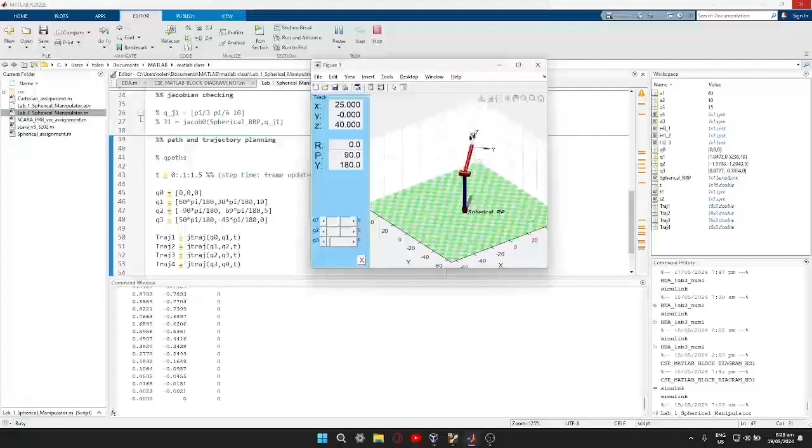So now we will run the program, and as we can see, it moves to the position that we set in MATLAB. We can double check it by pausing the video.

And now we will be moving on to Python. In Python, we will be running the pick and place file first.

First, we will be entering the values 40, 10, and 15 for A1, A2, and A3 respectively. And it will show us the scale model of our manipulator with its link lengths operating based on the values we entered. This manipulator attempts to operate a simple pick and place motion as a spherical manipulator.

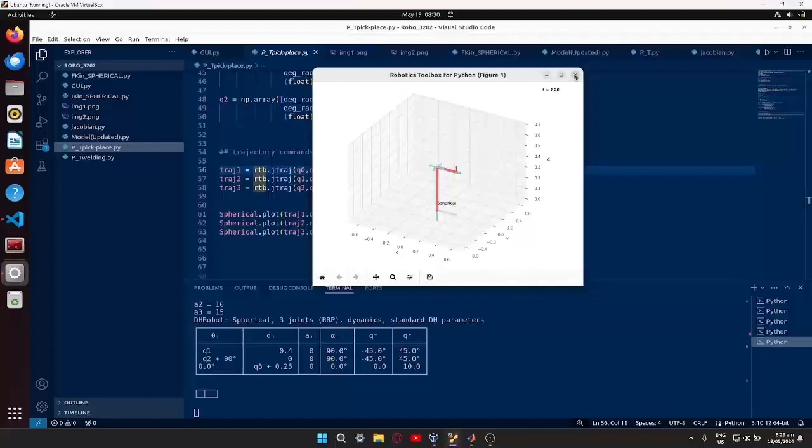So now we will move on to the welding part of our Python program. We only have to enter the values that we encoded in the pick and place program.

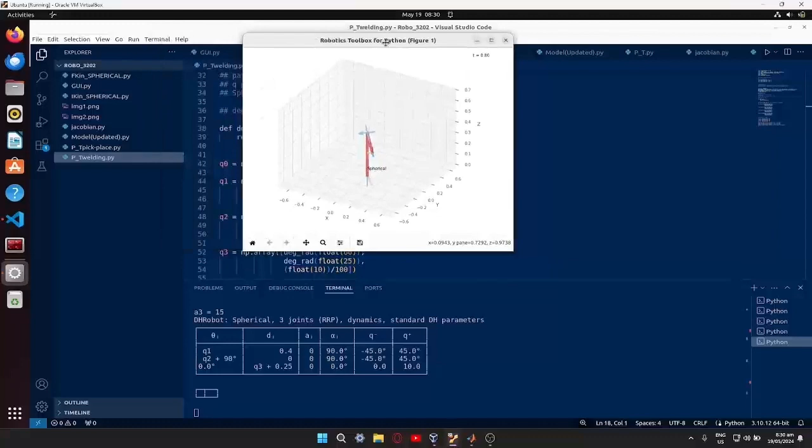Which is 40, 10, and 15. So let me repeat it. We will now enter 40, 10, and 15. And now we can see that the manipulator is trying to operate the welding motion as a spherical manipulator.

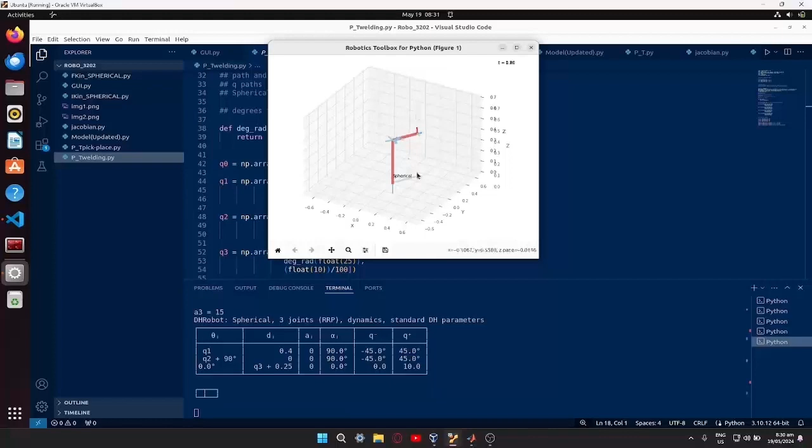As we can see here, we define the conversion that will convert degrees to radians. But now we can see that the prismatic joint is divided by 100 because we have to scale down the manipulator, while the revolute joints are converted to radians, as that is what is accepted by the robotics toolbox.

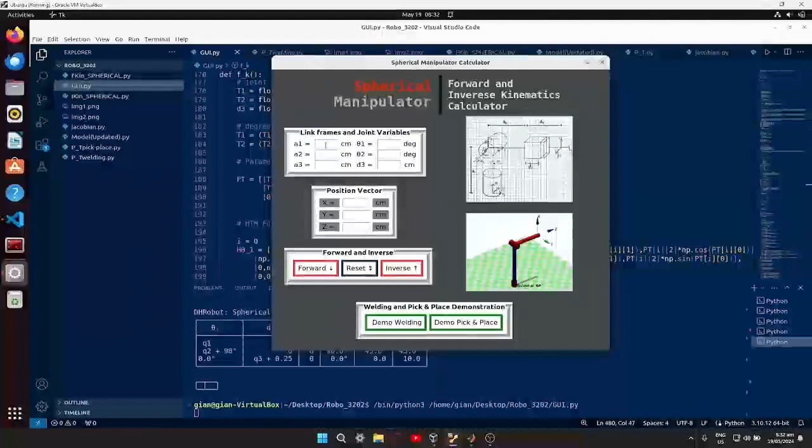The GUI calculator, on the other hand, automatically converts the values that the user enters, and these values are suitable for the use of the robotics toolbox, which is used by the GUI calculator as well.

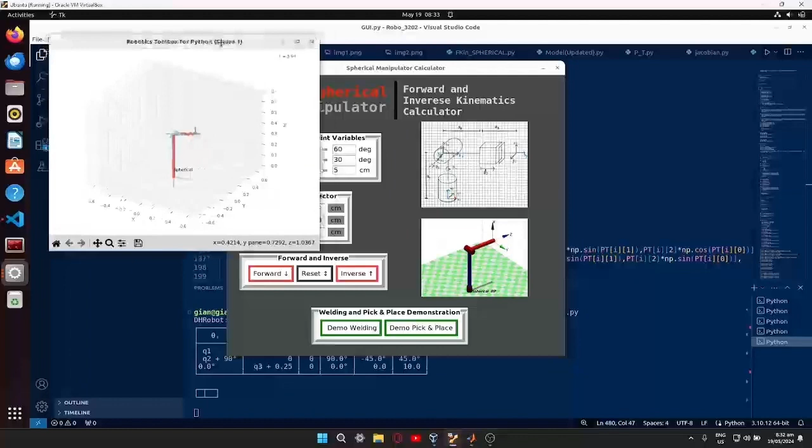Any value will work on the Python and MATLAB, but in the GUI calculator, entering any value below zero on the D3 or the prismatic joint will cause the GUI not to display the model, but instead display a warning that D3 should not be less than zero, because in real time, when a prismatic joint is zero, it cannot move back anymore.

So here I am running the demonstration of the welding motion of our spherical manipulator.

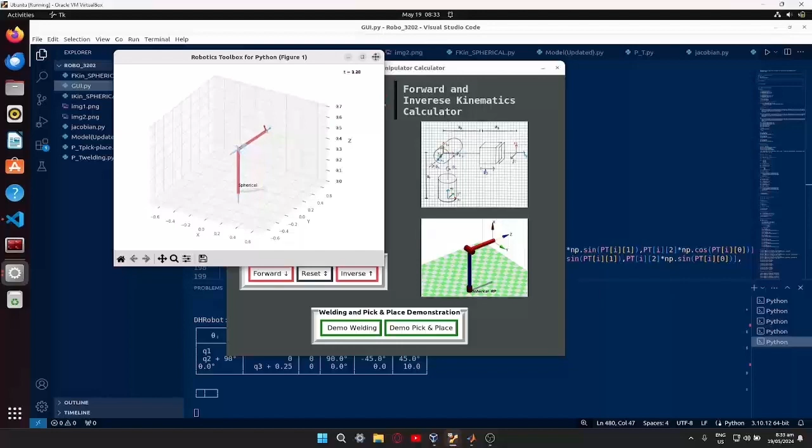We also have below the demonstration of the pick and place motion of our spherical manipulator.

So as we can see here, as I have mentioned earlier, if we enter a value that is less than zero, we get a warning.

And that is all for the planning of the path and trajectory of our spherical manipulator.